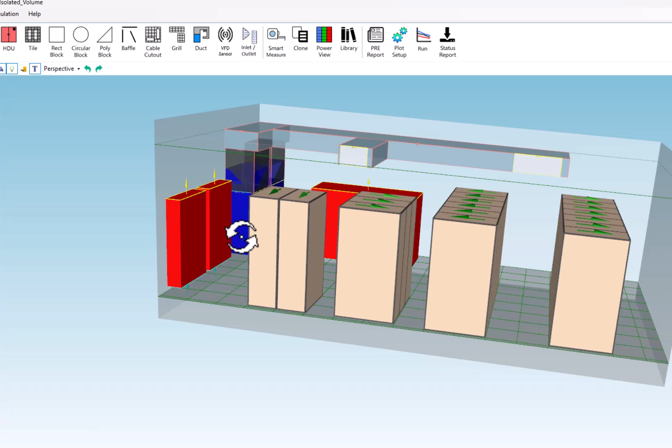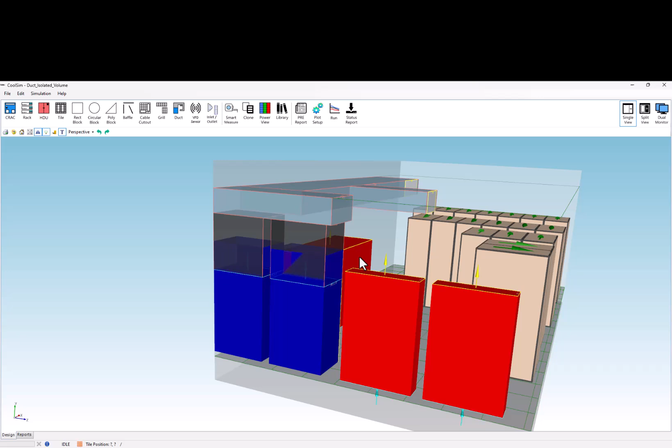So there's a couple of things that I can notice about this model right away. First of all, the user has used connecting ducts, and you can tell because they're black, but the user has also got CRAC extensions turned on. And the overlapping of the CRAC extension with the duct will cause an error, and you can see it's on the outside. It's on the output side of the cooling units, and that's going to be a problem.

So to fix that, we just right mouse click on the duct designer, and this user interface popped up on my other display. Fairly easy to fix. You just unconnect the duct and drag it back up like this, so it's up out of the way. Do the same thing to the second one. Just disconnect it and pull it back up.

And now let's go to these units and turn off the CRAC extensions. I don't know why the user has them on. They don't need to be on. They should not be on. So turn off the plenum extension. Okay. So sometimes you have to toggle that to get it to go off. There it goes. Okay. So that one's off.

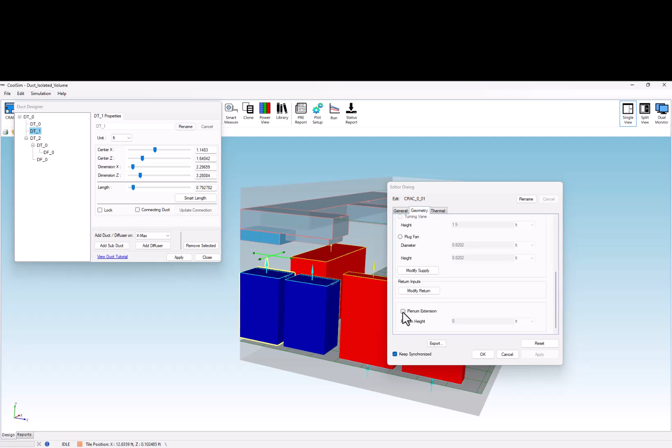And here's the other one. We want to go to the Geometry tab, scroll down, plenum extension. We want that off. It will do that funny thing first, then switch it off, and now it's off. Okay. So you have to toggle it. Now let's go back to our duct interface, and we can reconnect the ducts. We did that one. Go to this one, reconnect, boom. Okay, so we've solved that problem.

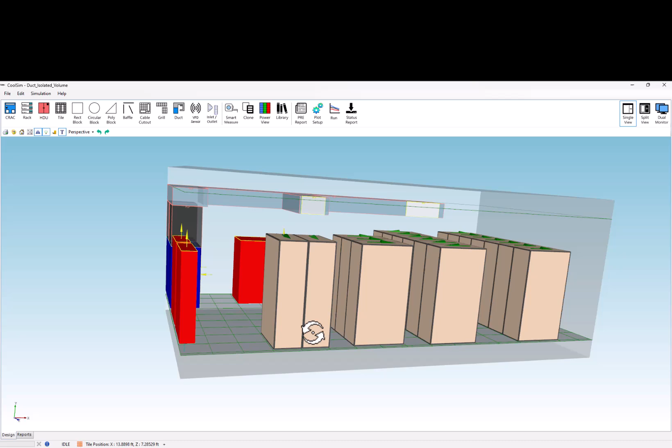Now there's a couple other problems I can see in this model. For one thing, the user has created an upflow cooling system, which is fine, but they've done it on a raised floor data center. And this is an isolated volume down here. So the entire subfloor is isolated from the above floor. This floor does not leak. And so the pressure cannot be calculated across that surface, and the model will fail because of that.

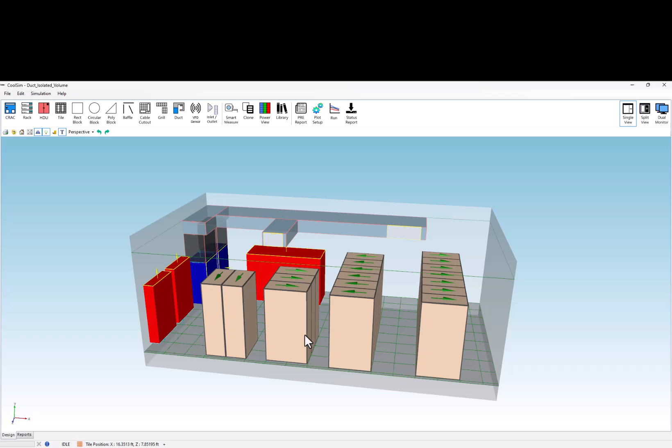Isolated volumes are one of the key reasons why, really one of the 2 or 3 reasons why models fail in Solve, because they're isolated. Now if you look, isolated volume in the ceiling as well. So this user should have created this on a non-raised floor data center without a ceiling return plenum. But you can see what they did here is they created, let me just drag over the user interface here so that we can have a look at it.

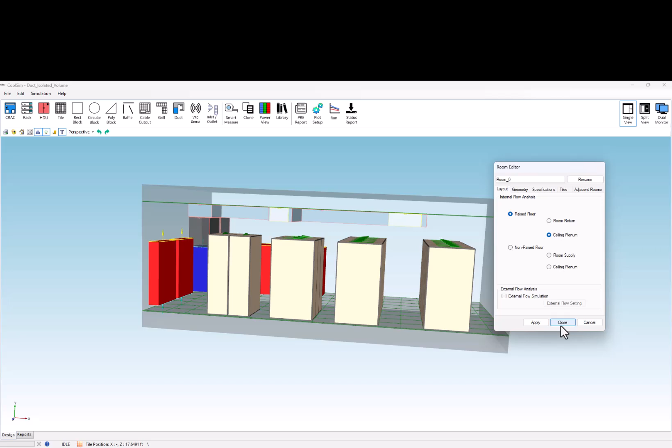The user created a raised floor data center with a ceiling plenum. I don't know why they did that. They really wanted a non-raised floor data center without a ceiling plenum. Now the problem is if I flip these switches now, it's going to mess this model up pretty good. So a way around that is to leave the model the way it is and just put a little tiny hole in the floor with a cable cutout. You only need one, doesn't have to be much, and put a little tiny ceiling grill in place.

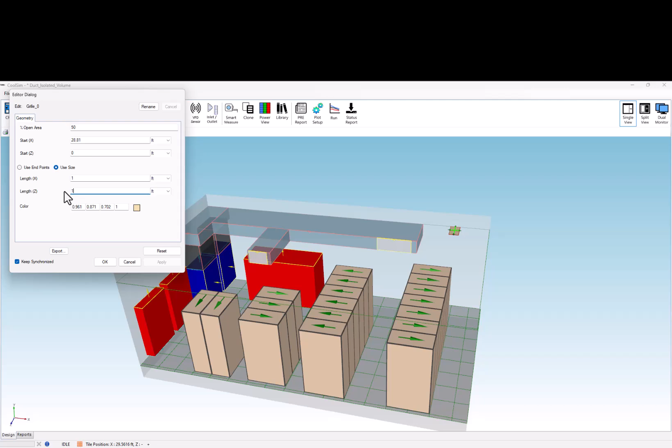Now the ceiling grills actually end up being 4x4, I think. We don't need it 4x4. I mean, it just has to be there. It doesn't have to be very big. So we'll make it 1x1, and there you go. And now that model should run fine.

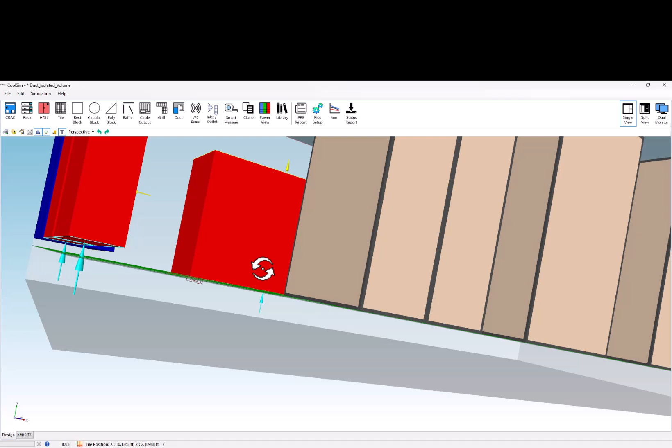The only other thing to check is make sure your units are up off the floor, because, oh well, look, in this case, the user has this unit sitting on the floor. It's at a start Y of 0, and it's trying to pull air out of a floor that has no inlet to the floor. So that looks like it's a mistake. These are up off the floor, so what I would do is make them all the same height.

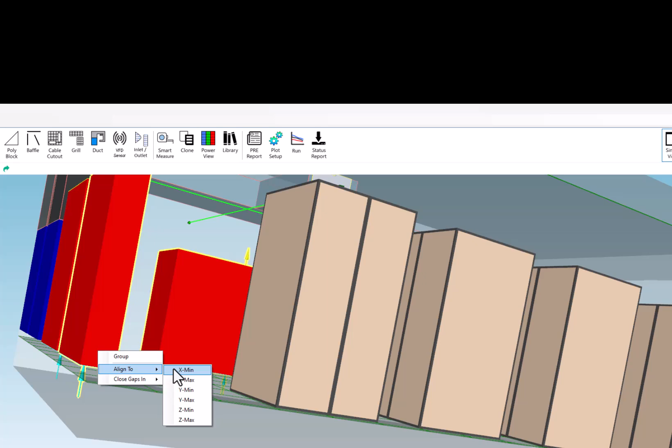You can do that by selecting this one, use your control key, select this one, put your cursor over the one you want to hold constant, do a right mouse click, and align to, in this case, Y min. And that'll lift that one up off the floor. And now we have both units off the floor so they can pull air in underneath them.

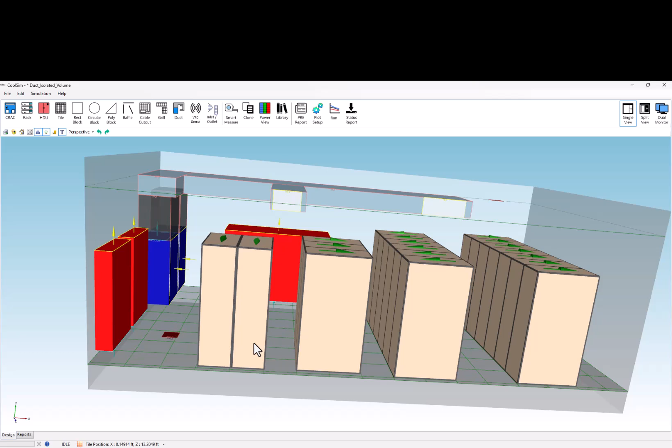This one doesn't have to pull it out of the floor. We've got a hole in the floor so that it will allow some pressure to be calculated across that boundary. We have a hole in the ceiling. There's outlets on the grills. There's the inlets. We fixed the problem over here with the return plenum, and that model will now run.